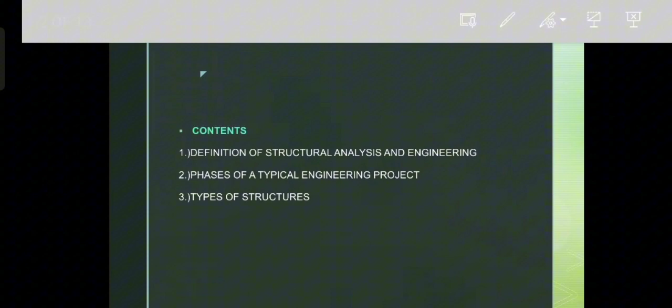Introduction to structural analysis. Next slide. So, let's discuss first yung ating contents, ano. So, dito sa ating video, we are going to discuss the definition of structural analysis and engineering. So, dalawa yan, structural analysis tapos structural engineering. Pinagsama ko lang dun sa number 1. And then number 2, phases of a typical engineering project.

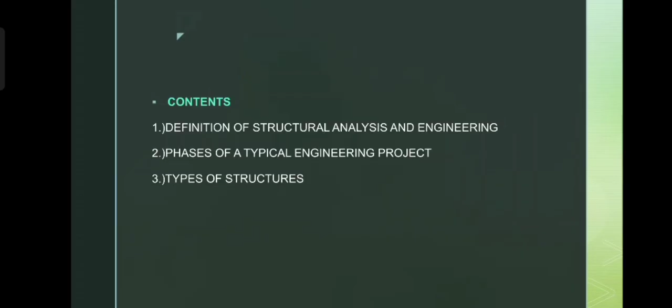So, number 3 is types of structures. So, ito mahalaga din to. Types of structures. So, i-discuss natin mamaya kung ano yung mga types na yan, kung bakit natin kailangan malaman yan. Okay, so, una, pupunta na tayo dun sa definition of structural analysis and engineering. Okay, so, role of structural analysis in structural engineering projects. So, we define the two.

So, structural engineering is the science and the art of planning, designing and constructing safe and economical structures that will serve their intended purpose. So, ang problem kasi sa atin, pag nag-aaral tayo, tinitake natin as a whole yung mga sentences, yung mga definition na ganyan. So, dapat hinihimay-himay natin para maintindihan natin. So, science and art of planning. So, imagine mo planning mula sa umpisa bago ka mag-start. So, everything from scratch. You need to have a plan, okay, before you take action.

And then, designing. Of course, yung planning para yun dun sa structure na tatayo. Designing, dito na papasok yung analysis natin. So, structural analysis and designs. Papasok dyan. So, lahat yan pasok sa structural engineering. And constructing safe and economical structures that will serve their intended purposes. So, itong structural engineering, importante talaga to sa vertical structures na tinatayo natin.

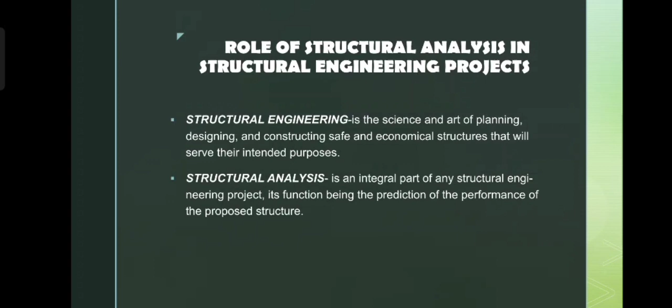So yun yung ibig sabihin ng serviceability, and yan ang isa sa mga performance na kailangan natin i-predict based on structural analysis. So we are going to discuss those things in the later chapters, of course. Nasa introduction lang tayo, and nandito pa lang tayo sa pang ilang page pa lang to. Okay, so next na tayo.

Isa-isahin natin. So, when you are planning, yung una natin tinitingnan is yung function. Functional requirements of the proposed structures. Of course, kailangan nyo i-define why you need to build those structures in order for you to give the best design intended for those functions. You need to identify those things first and be able to plan on it. And then the next one is the general layout and dimensions of the structure.

Of course, when we say the dimensions of the structure, we are talking about the overall dimensions of it when you look at it in a plan view. Of course, in the boundaries, you need to be able to build those boundaries onto the site. You need to be able to find those intersection points of the lot and boundaries. The dimensions of the structure let you foresee how it is going to be located or put onto the lot area available.

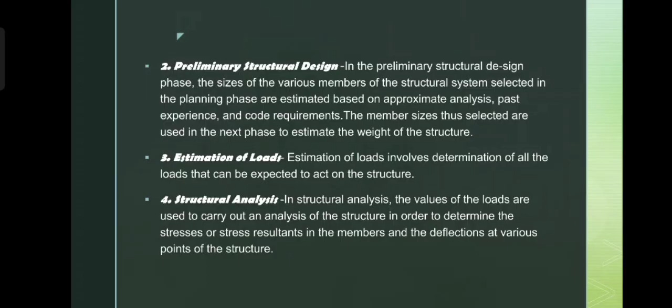By doing this, we are able to predict the performance of our building. We need to pass the structural analysis first before continuing to the next stages. Part of structural analysis also includes safety and serviceability checks, which I mentioned earlier—these are part of the analysis as well.

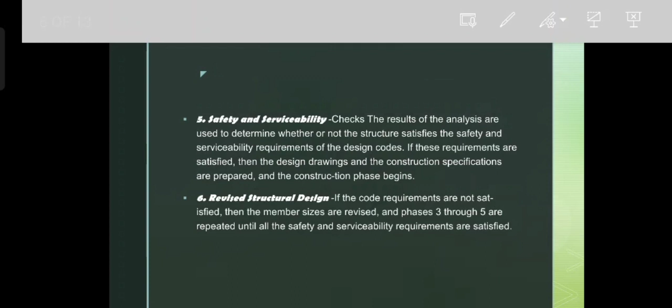So we do that together with analysis. If you're using STAAD, after we analyze, we really do a serviceability check.

Performance and building analysis is a whole, it involves safety and serviceability checks. The results of the analysis are used to determine whether or not the structure satisfies the safety and serviceability requirements of the design codes. Structural analysis is required for us to be able to do these types of checks. If these requirements are satisfied, then the design drawings and construction specifications are prepared, and the construction phase begins.

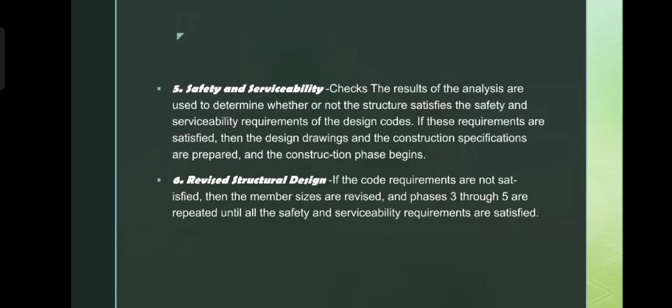So we have another phase here, number 6, revise structural design. If the code requirements are not satisfied, then the member sizes are revised and phases 3 through 5 are repeated. So if our design or analysis is not satisfied, we go back to number 3 to 5 until we are able to come up with the right dimensions, the right design, the right structural system that will carry our structure.

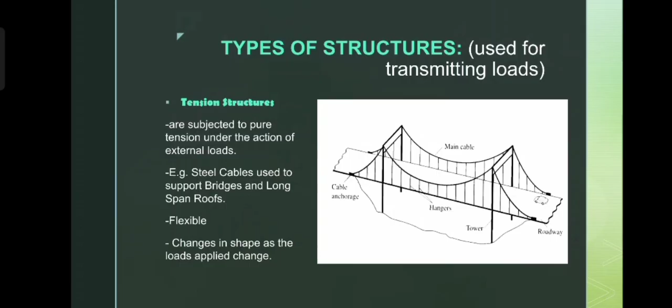Next, compression structures. We already know that one, so the most common example is column or arch. This is rigid, in contrast to what we did with the tension structures, this is rigid.

So it is rigid. Okay, so it may also contain other forms of loadings like shears, so bending moments.

But when a straight member like a column is subjected to lateral forces and it causes the column to bend, that's going to be called a beam column. That's the beam column, in case you didn't understand. So if you really think about it, almost all members can be considered a beam column, of course.

Because we can't really say what's going to cause the column to bend if there's a lateral force. I think an enough amount of lateral force is going to cause a column to be a beam column.

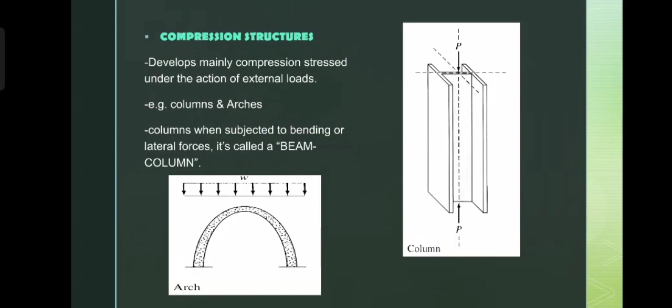Let's see, let's go back a bit. No, that's not a truss. Where did I see that image? Did I put something like that earlier? No, we don't have it yet here, the bridge with a truss. Okay, so let's just go back here.

So when the loadings are applied at those parts, the members either elongate or shorten. So that's why a uniform tension-compression type of truss is ideal.

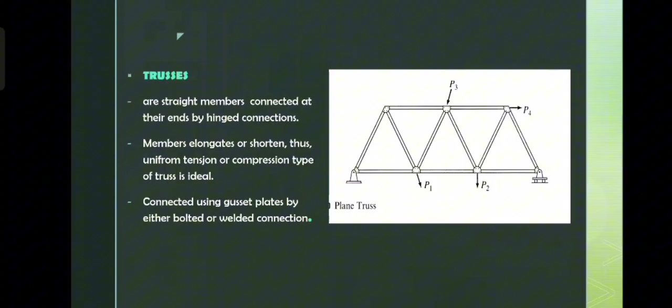So next one is shear structures. So shear structures. Alam natin yan, shear walls. Okay, so shear walls are used to prevent lateral movements, okay? Or lateral loadings, parang support siya doon sa lateral loadings because it can develop in plane. Okay, kung sinabi mong in plane is yung stress niya kaya niya padaanin doon sa plane ng mismong shear wall natin, so kaya niyang dalhin doon yung stress.

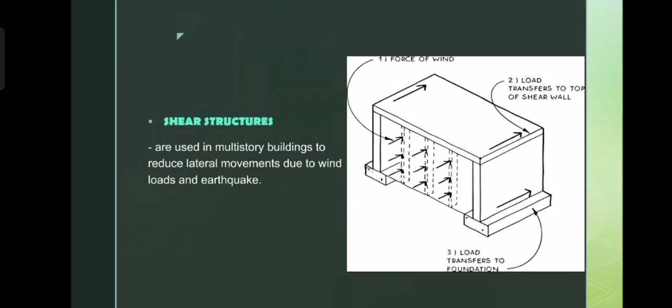Okay, so they are being used in multi-story buildings to reduce lateral movements due to wind load and earthquake. So, lateral movements natin dalawa lang yung nagbibigay, wind load and earthquakes. Alam mo na yung lateral loads. Pero hindi mo alam na wind load lang pala yun at earthquake unless maglagay ka ng applied lateral load talaga dun sa mismong building mo. Halimbawa, sandal ka ng anong klaseng bagay doon. Pero kung wala, itong environmental effect lang, which is earthquake or wind loads, yung magko-cause ng lateral pressure dun sa ating structure. Okay, so those are shear structures.

And those are bending structures. Of course, alam na natin yan, slabs, beams. Hindi naman na kailangan i-explain kasi ito yung pinaka-basic ng ating design. Pinaka-basic ng civil engineering is always bending, flexure. So, flexure type members or structures are most commonly known sa ating profession. But I'm still gonna read this description here. So, develop mainly bending stresses under the action of external loads. In some structures, not just external loads, gravitational loads or weight, kasama dyan.

So, in some structures, the shear stresses associated with changes in bending moments may also be significant and should be considered in their designs. Of course, we put reinforcement because this type of structures experiences shear as well and other stresses. Some of the most commonly used structures are beams and rigid frames. So rigid frames, kasama na pala siya dun sa bending structures. We are gonna have a detailed discussion of rigid frames in our next video.

Okay, so naglagay ako ng list ng mga next na i-discuss natin. So, bago tayo matapos sa video. So, plates can be classified as bending structures. Understanding the bending structures, a beam is a straight member that is loaded perpendicular to its longitudinal axis.